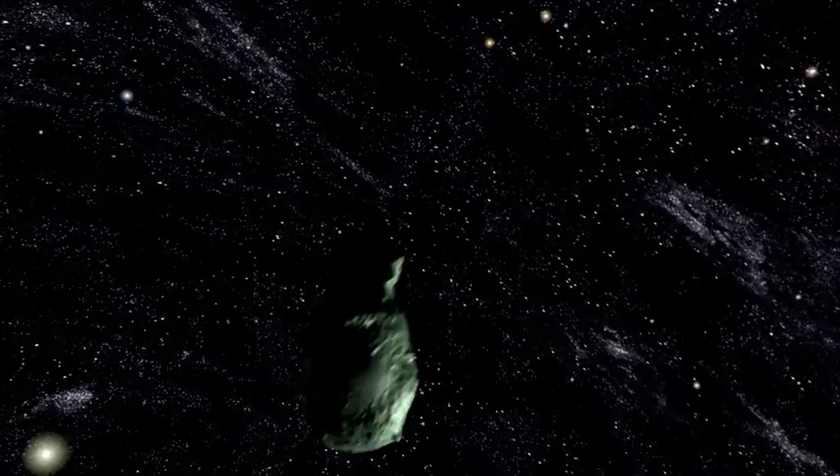In the name of God, the Beneficent, the Merciful. He it is who appointed the sun a splendor, and the moon a light, and measured for her stages, that ye might know the number of the years, and the reckoning.

The Holy Kaaba in Mecca, the direction of prayer for Muslims throughout the world. Here, in the near proximity to Islam's holiest site, the biggest clock in the world is being constructed to offer Muslims a new time source.

The custodian of the two holy mosques, King Abdullah, commissioned SBG, a leading Saudi construction company, to build the Mecca clock. With the project at heart, the king has been personally involved in each step of the development.

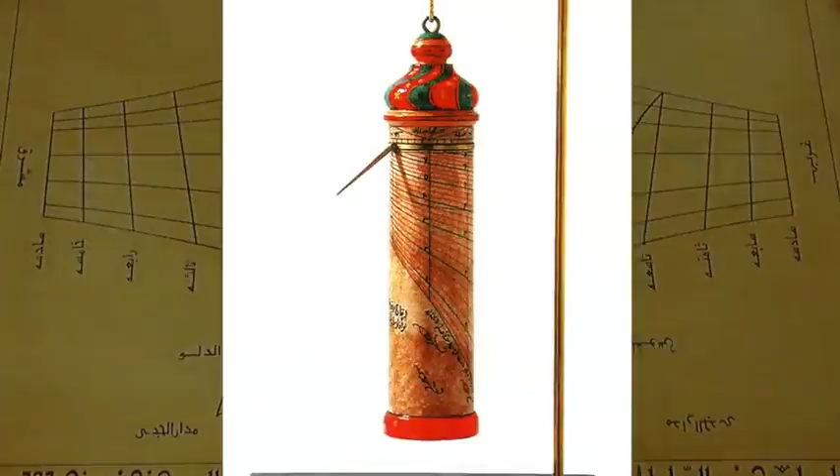Since time immemorial, man has developed instruments to measure time with ever greater precision and accuracy. In past centuries, Muslim scientists have developed instruments such as sundials, astrolabes, and mechanical clocks to improve the accuracy of time measurement and also help establish a more precise Islamic calendar.

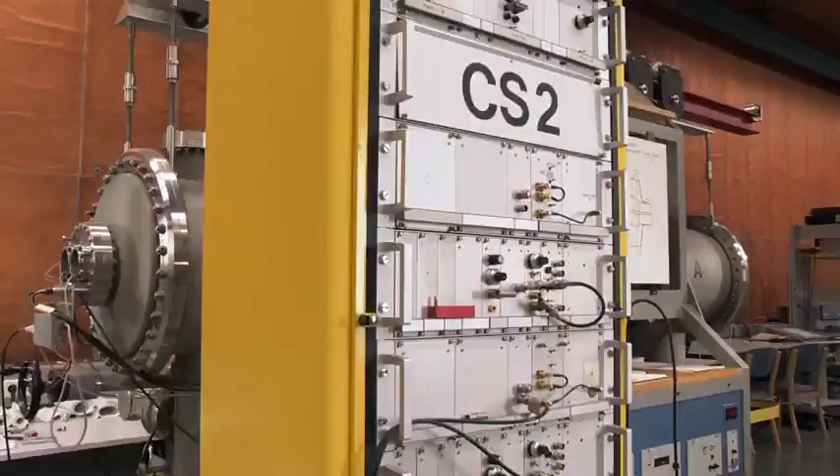Modern science and technology requires time measurement to be extremely precise. The Mecca clock features an atomic clock and will be coordinated with other time signals throughout the world, providing Muslims with a precise time signal, the Mecca time.

It was S.L. Rasch, a German design firm with great experience in the holy cities, that was commissioned to lead the development team of specialist engineers and scientific experts. Over the course of nearly 4 years, the team produced hundreds of design studies, revising and refining every aspect of the clock tower.

The design of a tower clock in Mecca is not something that you can pick up from a book. So we had to develop it in an iterative process, step by step. You do a thing, you do it again, you do it again, until it becomes good. And the eye knows more than the brain.

The lack of an historical model for an Islamic clock was the first challenge we encountered during the design of the Mecca clock. Our approach was to make an extensive study of all Islamic industries, such as metalwork, astrolabes, and Quran ornamentation. We made a thorough study of all this, and that enabled us to come up with a design approach for a clock that is modern on the one hand, and yet still designed in an Islamic style on the other.

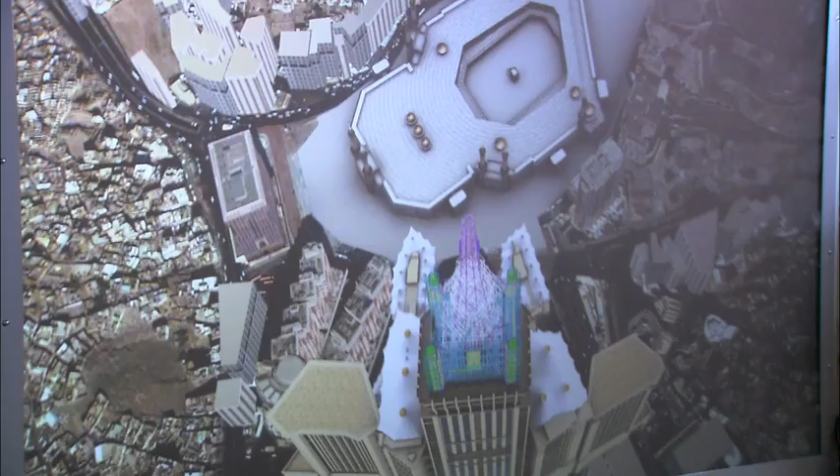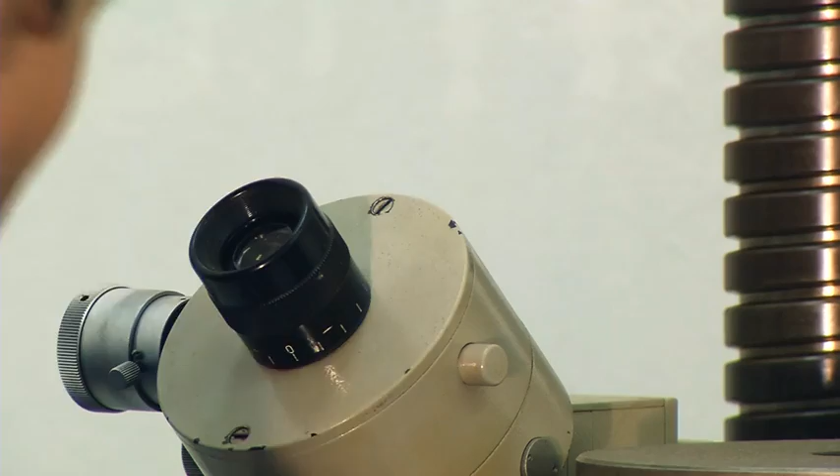A building of that prominence in this place starts to develop its own dynamism, and with the grace of God, it turned out to be a real thing. The large size and complexity of this project and the aim to reach the best possible quality required extensive scientific research. This included the development of new construction materials, techniques, and methods.

The clock tower combines innovative construction technology and authentic Islamic design. The higher management in Saudi Arabia issued new directives and initiatives in close collaboration with the team of architects and experts. The Mecca Clock Project truly sets a new milestone in history.

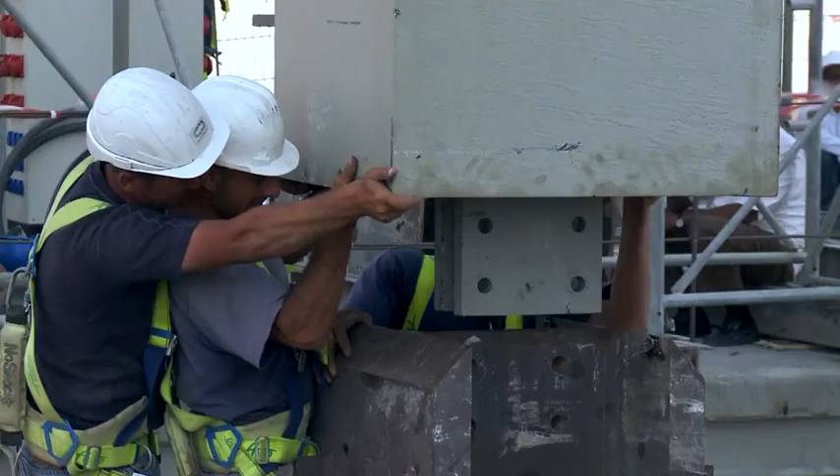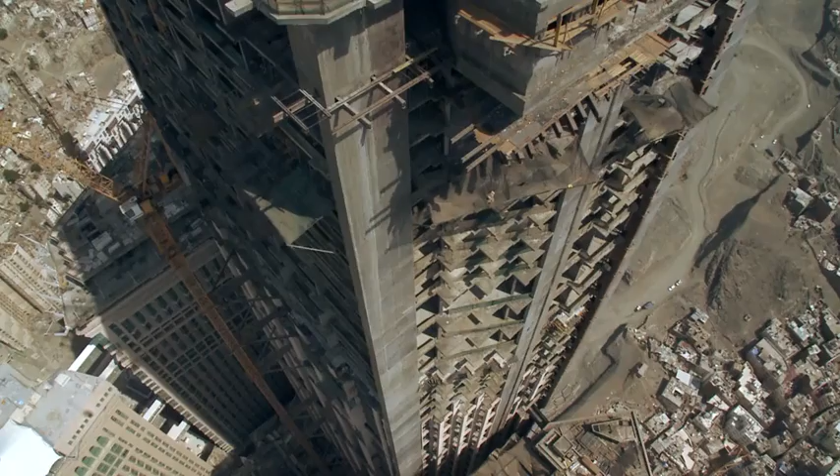The main difficulty of this project was to make a lightweight steel construction that would be able to carry this clock on top of a concrete tower. An experienced engineering firm from Stuttgart came forward with the best solution. Our task was more to extend an already existing building, which at the time hadn't quite been completed and had only partly been built.

The main challenge facing us was raising a 450-meter-tall high-rise building to over 600 meters. We only achieved this by using a lightweight construction. We took the Eiffel Tower as an example. The special feature of the Eiffel Tower is how it's designed according to the flow of forces. As forces increase, so does the size of the base. The idea was basically to develop a supporting structure in which forces flow directly from top to bottom.

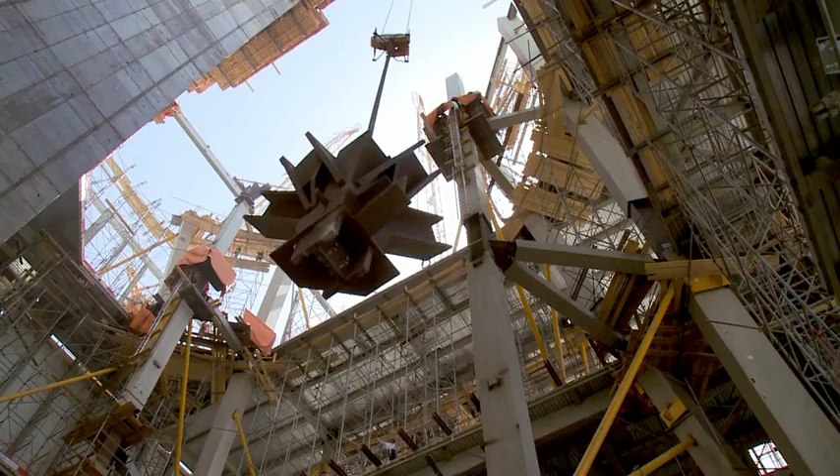The weight of the load-bearing steel structure is around 12,000 tons. That's around 2,000 tons more than the Eiffel Tower. The Eiffel Tower allows wind to pass through it, while the Mecca clock has a large surface area exposed to the wind, something the construction has to be able to cope with.

You could say that the face of the Mecca clock is about 35 times bigger than that of Big Ben. And on a clock face of this size, with a perpendicular wind force of 200 kilograms per square meter, there is a total of 300 tons force acting on the face. This is roughly equivalent to the weight of 10 medium-sized trucks. This is the kind of force the clock face must be able to withstand.

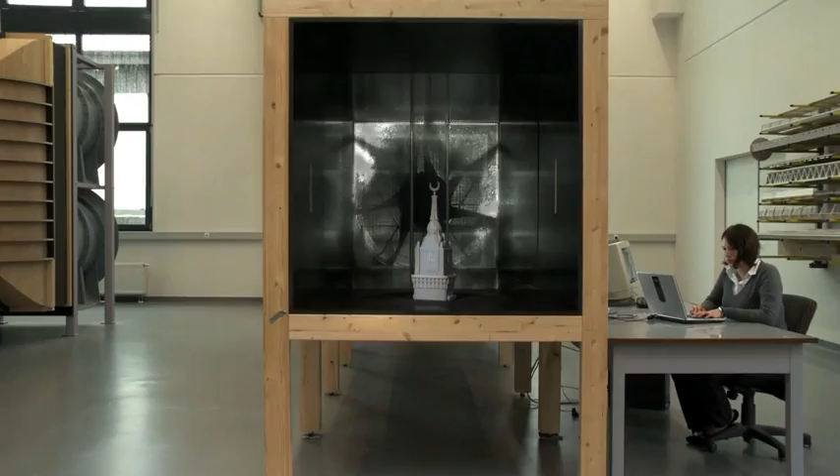For this reason, extensive wind testing was carried out. We want to make sure the entire tower doesn't just collapse. But this isn't all. Not only is there a clock face, but clock hands too. Each clock hand is roughly comparable to a wing of a medium-sized aeroplane. They mustn't hit the clock face. After testing, it was proven that there was no fluttering of the hands.

In both studies, those in the wind tunnel and in the numerical simulations, we had to make sure that we took standard wind speeds from the geographical location of the building. The building is designed for maximum gust velocities of 250 kilometers an hour around the spire. That is a wind that occurs once on site in Mecca every 500 years.

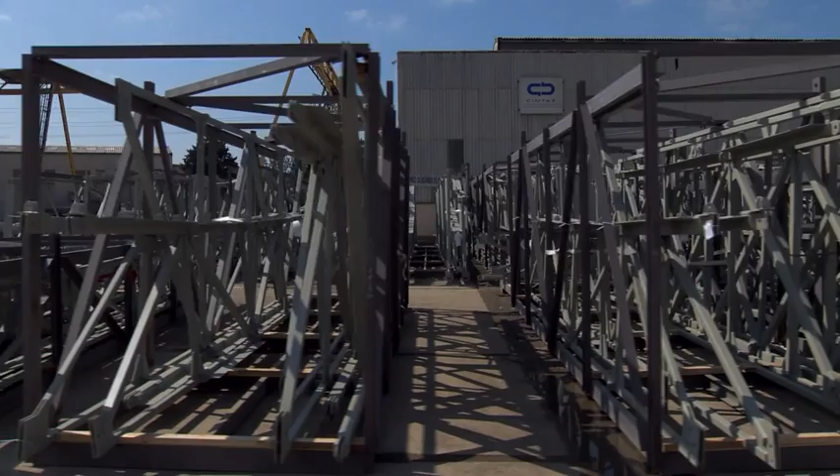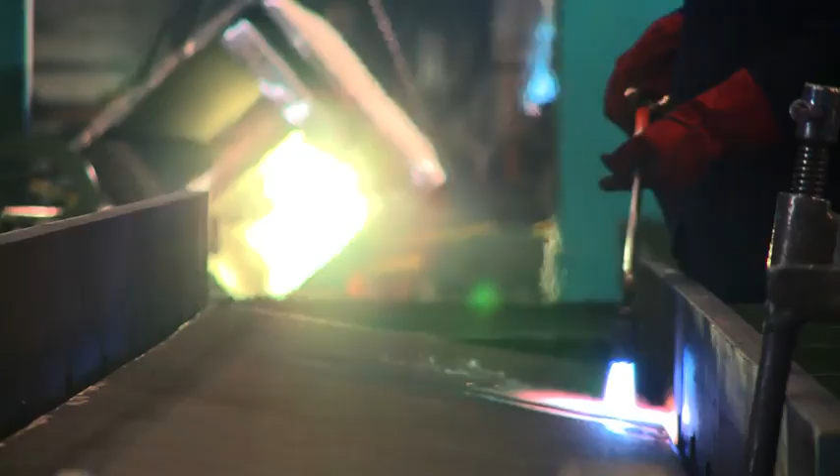An experienced manufacturer from Turkey was chosen to produce the steel components for the clock tower. Some 140,000 unique steel components have been prefabricated and welded together to make up the 14,000 distinct elements that we are going to install on site. The fabrication output at the fabrication shop has been up to 1,000 tons per month, with about 200 people directly involved in the execution.

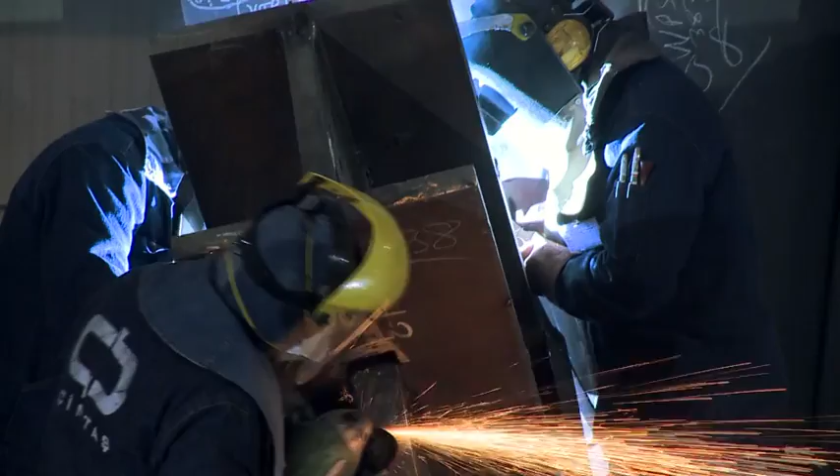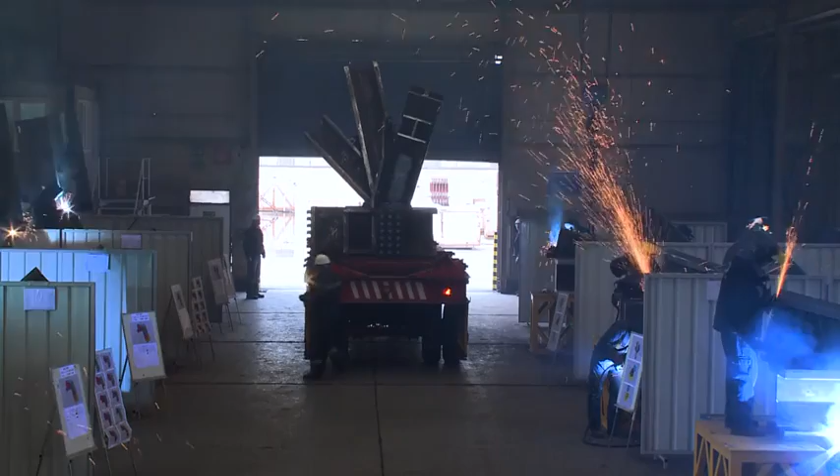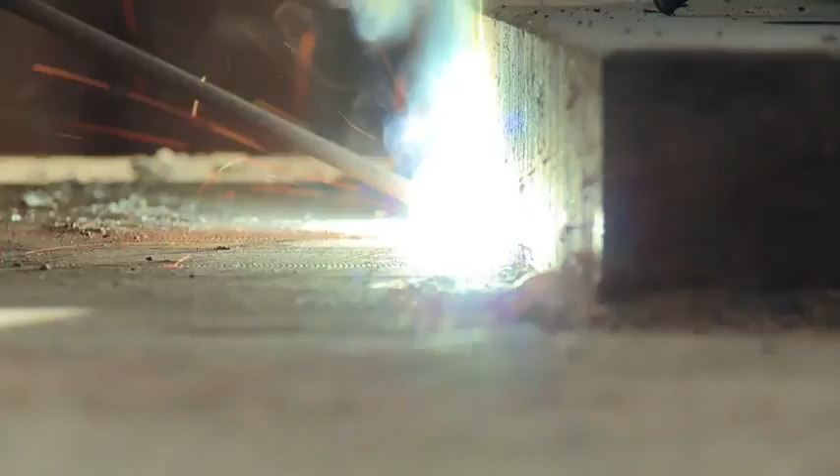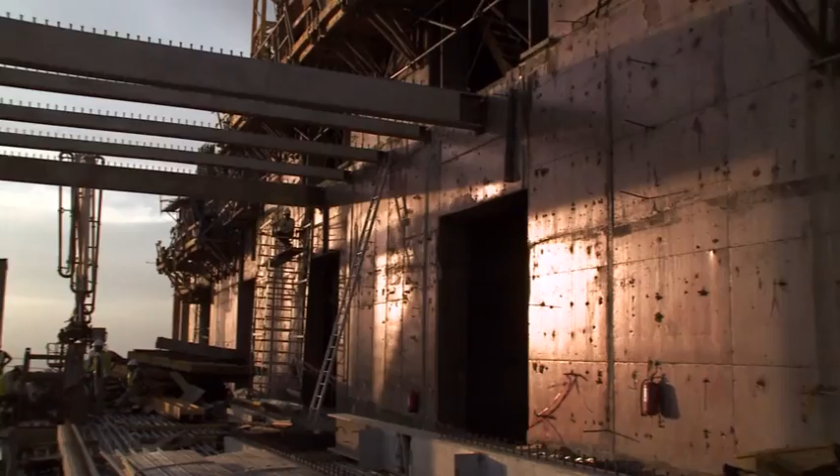These elements, and in particular their weight and size, have to be optimized in such a way that you are able to transport them and install them at elevation with millimeters of tolerance. At heights of up to 600 meters above ground, the steel was rigged and welded. Apart from its location and height, I believe the welding intensity is unique about the Makkah Tower project. Altogether, along with 45,000 bolts for connecting these elements together, more than 100 tons of welding material and 80 certified welders have been used on site.

Seven tower cranes were needed for lifting the parts. The Mecca Clock Tower has a total weight of approximately 83,000 tons. This makes it the heaviest clock tower ever built.

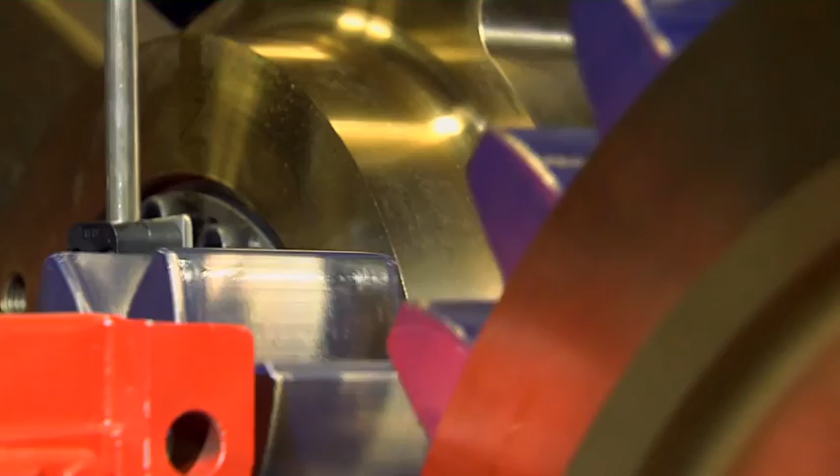For the development of the clock system, a specialist manufacturer was found in southern Germany. Making the world's biggest tower clock is a unique challenge for us, and one that no manufacturer of tower clocks has ever been faced with before. This project marks a milestone for us. Never in our company's near 150-year history have we ever had to deliver something of this size and scale.

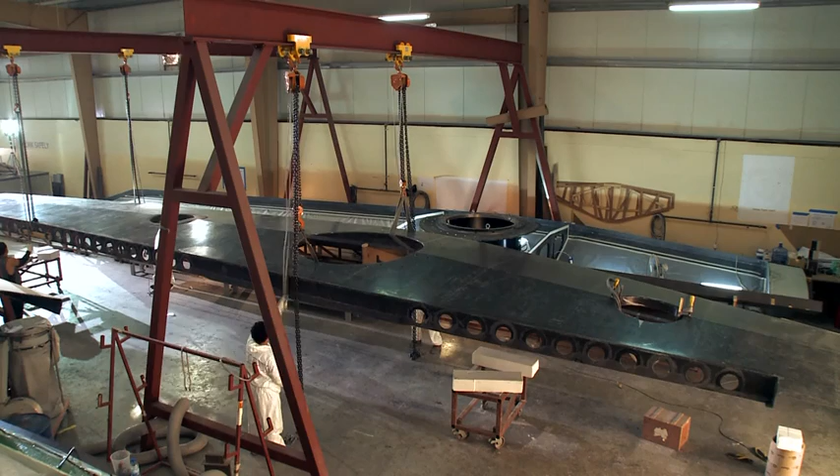The design and engineering of the world's biggest tower clock posed a unique challenge. In the early stages of planning, a traditional design was preferred, with long pronounced hands extending from the center of the clock face. The hands' huge dimensions and weight, however, raised immediate concerns. The major concern was that in stormy conditions, the hands would flutter and knock against the face of the clock.

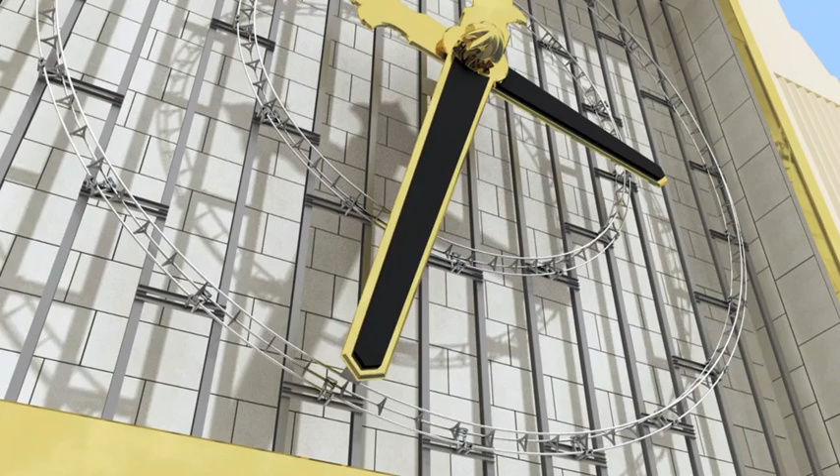The very first suggestion was to drive the large hand over a roller coaster. A circular track behind the clock dial then carries a vehicle that drives the hand through a slit in the clock face. We noticed that this solution had some disadvantages, most notably with dirt, abrasion and wear and tear. This was because the peripheral device was going round the track day and night.

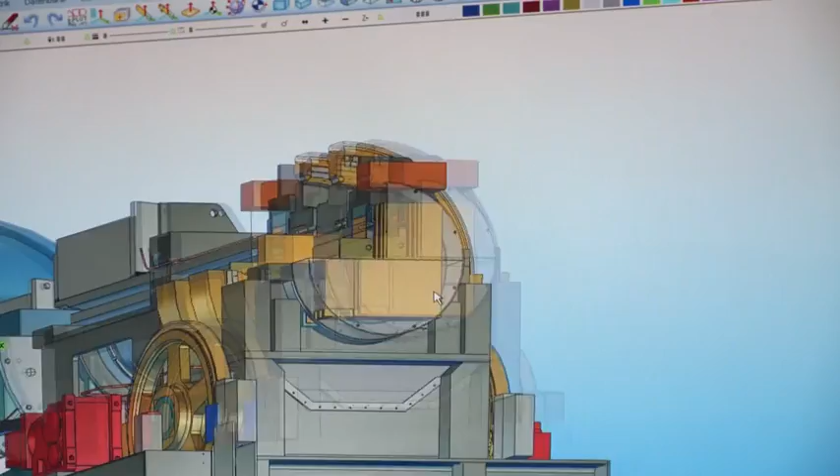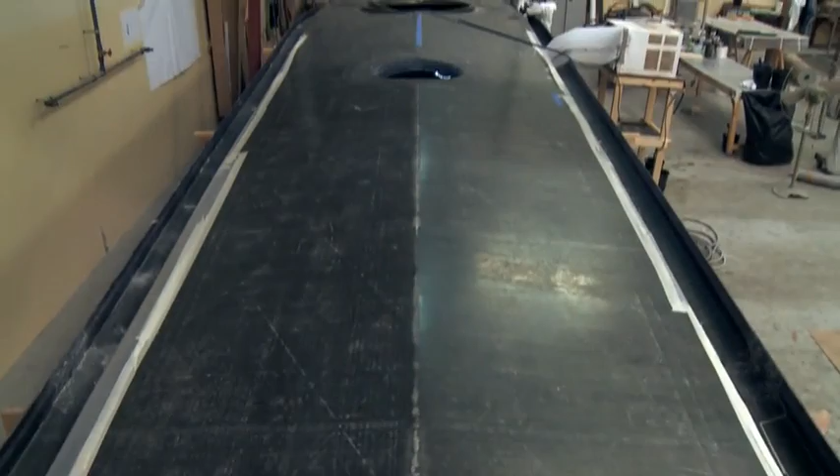Finally, we decided to change the whole clock face. We make it recessed in order to reduce the wind load. Secondly, we make the clock hands very, very stiff. They are stiff like a racing boat with pure carbon fiber. And on top of it, we go to a central drive system with a much more solid mechanism. So I think it will survive any storm in Mecca.

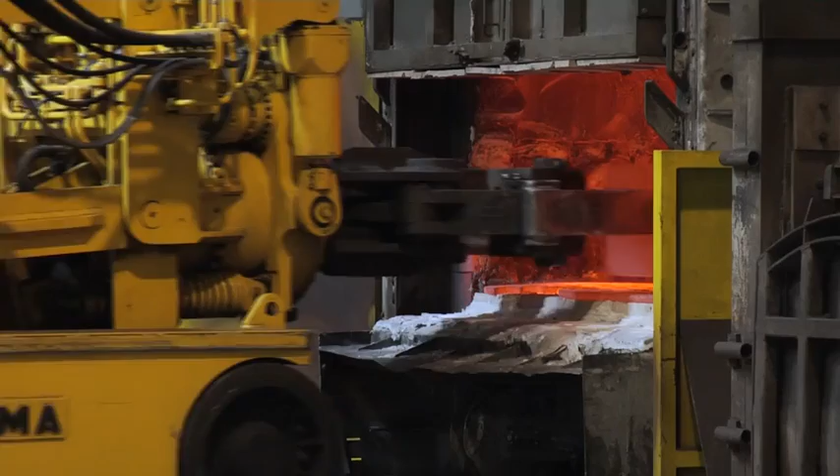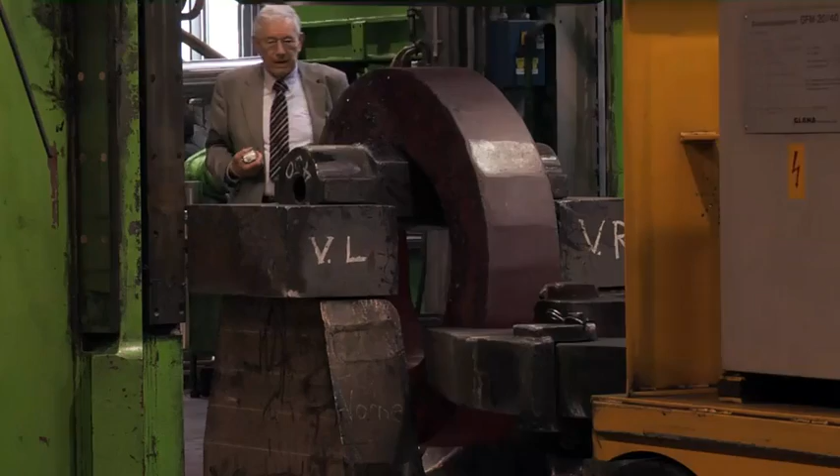The diameter of the clock face is 43 meters, and since this totally exceeds what's normal, new cogwheels had to be produced. The material is a special bronze that has very high strength, excellent gliding properties, and very little wear and tear. This is important when it comes to the operational lifespan of each part.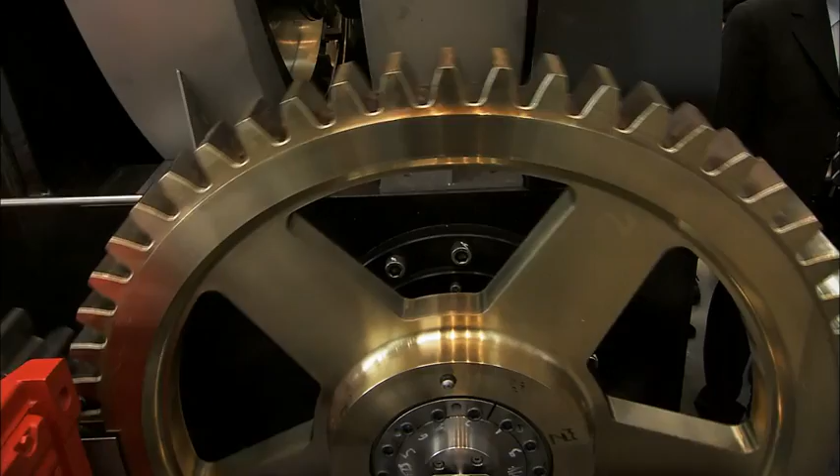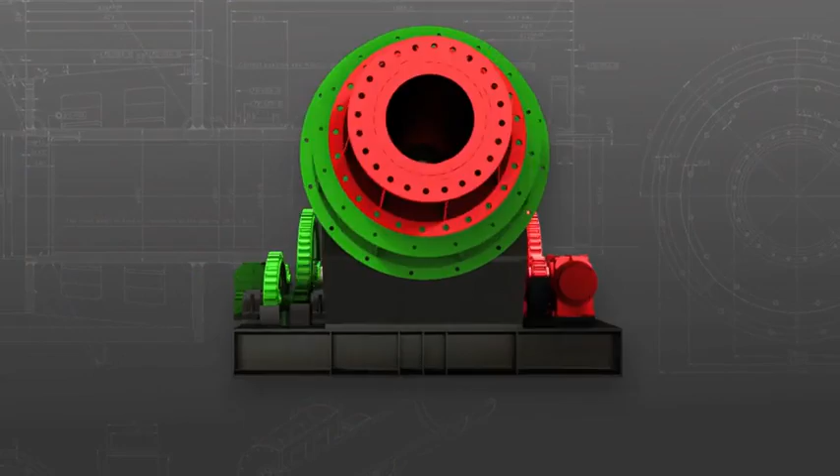The clock drive is the biggest and heaviest in the world. This unique mechanism weighs over 21 tons. The minute and hour hand are driven by separate drive units. The next stage of development was to produce a pair of rigid clock hands.

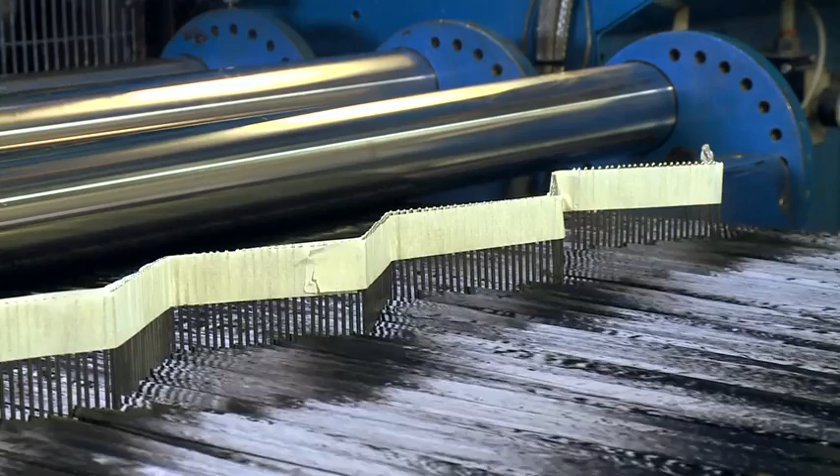The clock hands presented us with a particular challenge because they're very long, slender structures which are relatively highly loaded by the wind loading. In this case, we chose to use carbon prepreg. Prepreg is a material where the resin and the reinforcements are pre-combined in the factory.

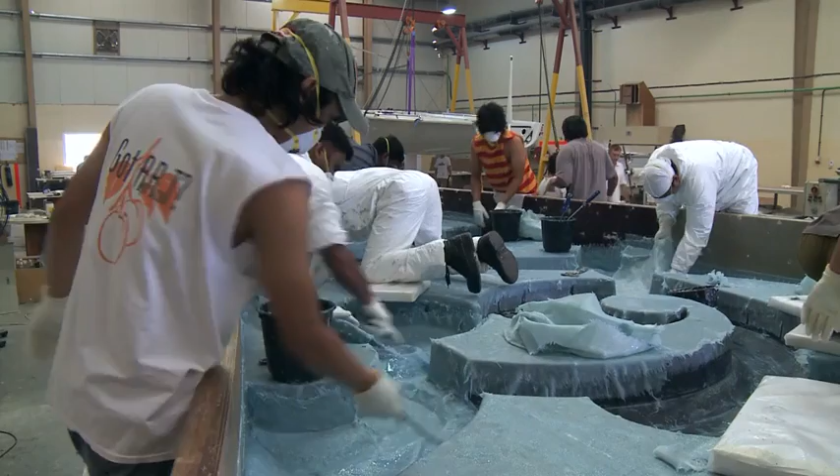The benefits of using these materials in the Mecca Clock Tower are that we can get a very accurate reproduction of complex shapes by moulding the facade panels. We also have a very good strength and stiffness to weight compared to traditional materials, so this reduces the weight of the facade itself. The clock hands, which are the highest loaded parts on the whole building, are built in carbon fiber prepreg. Same material is used in Formula One and the aeronautical industry. For me, it's the ultimate high-tech material.

The minute hand is 23 meters long and 3 meters wide, and it's built like an 80-foot racing yacht. We use 2,000 kilograms of carbon fiber on each of the clock hands.

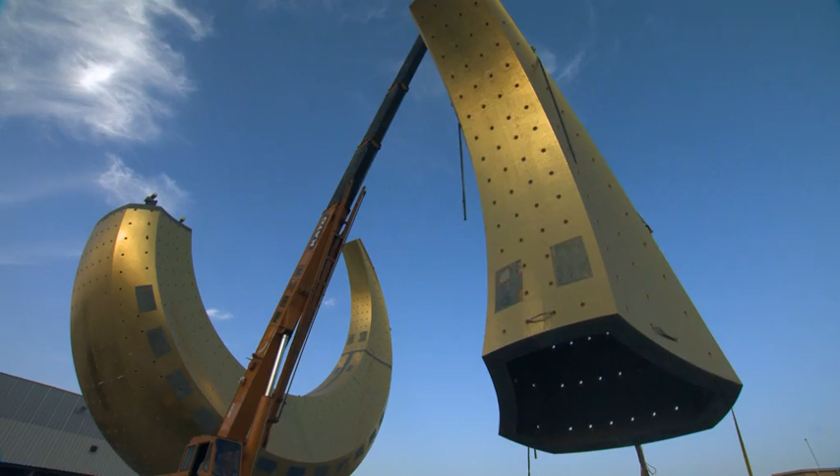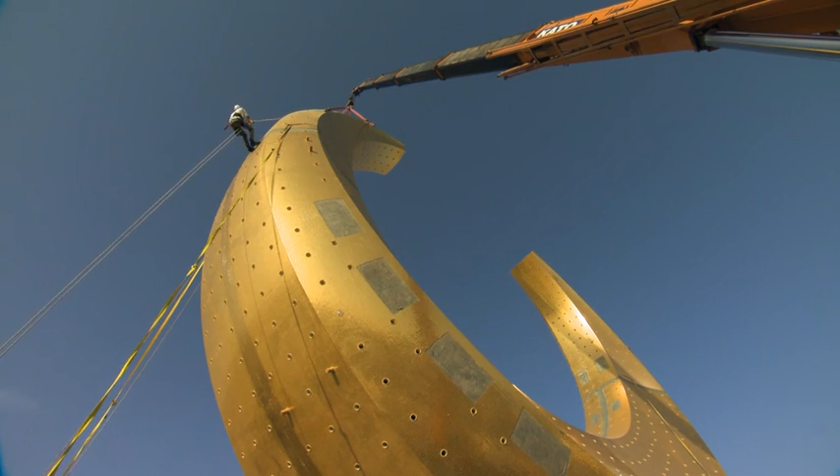The biggest challenge for us was the hilal. It's a monocoque structure, self-supportive structure, 25 meters wide. It is built completely without any steelwork. It has a composite shell cladded with gold mosaic and bulkheads and frames inside which carry the load. Upon completion, the crescent will house an office space and a prayer room, the highest usable space inside a building.

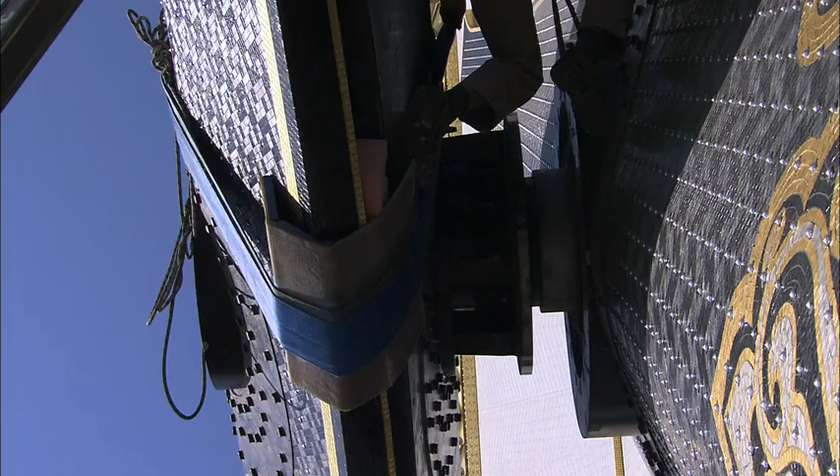The complexity of the whole design, with the combination of the composite panels, the mosaic tiles and the LED tubes, all came together to give us quite a challenge to be able to produce a structure that would meet the requirements of the design and also live up to the aesthetic vision of the architects. A quarter of one clock face was set up and successfully tested over the course of several months.

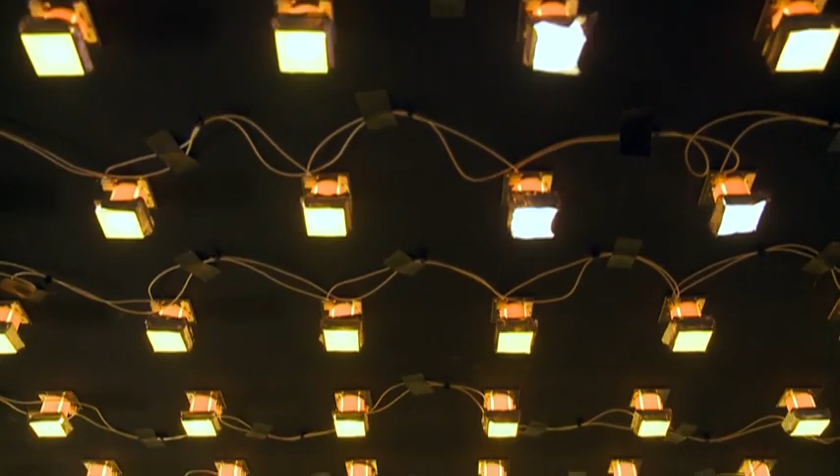The question arose immediately. Should the background be dark? Should the clock hands be bright? It's also a question of aesthetics. Theoretical studies of Christian Bartenbach showed that the best readability in the day is black and white, and the best readability in the night is green and white, which was different than what we had expected. The only idea coming was to equip the whole clock with LEDs.

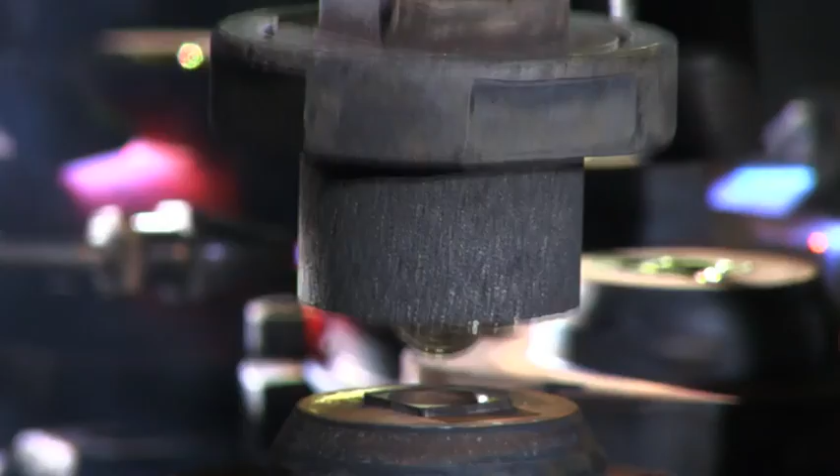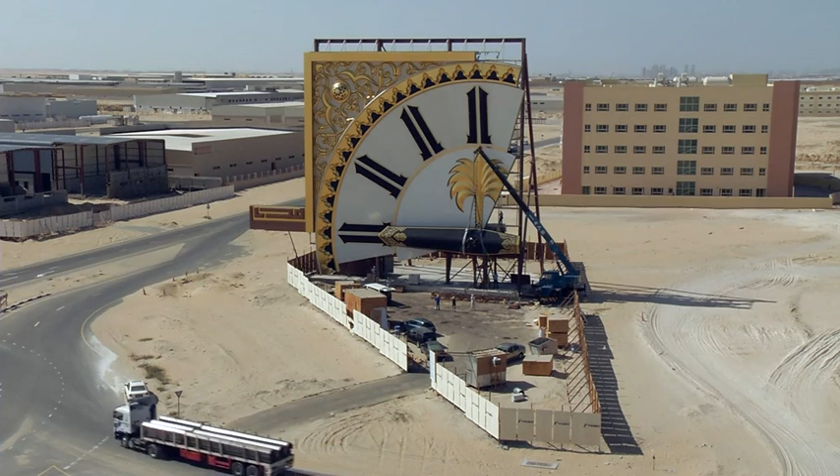New light sources like LEDs have very high luminance, 60 million candelas per square meter. In total, approximately 2 million specially developed LED light fixtures were produced. So we expect a readability of that clock in the day and in the night from 7 to 10 kilometers. Visually speaking, the realization of the clock in Mecca was a special task, and one that cannot be compared to any of my other projects. It's quite simply special.

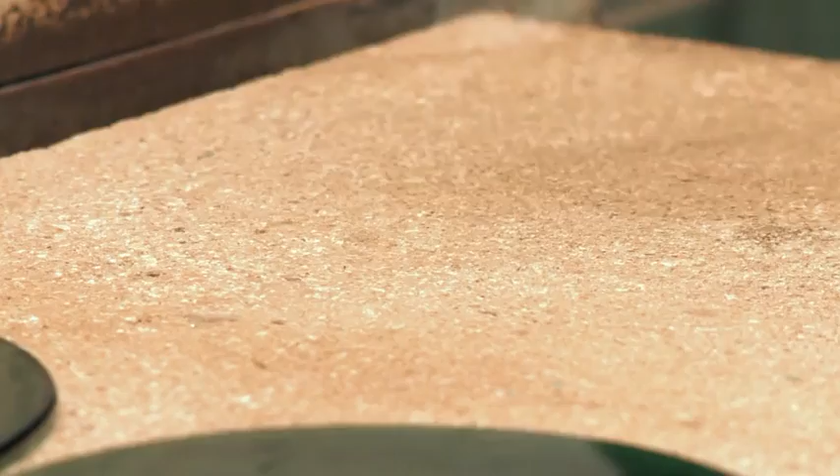You could say the tradition of Venetian glass mosaic is over 1,000 years old. The technique we use today is the same technique my great-grandfather, Angelo Orsoni, developed all those years ago. It's safe to say that the Orsoni brand is an exclusive and completely unique product. For centuries, this gold mosaic has been manually produced in small quantities by master craftsmen. In order to fabricate the required 13,000 square meters of gold tiles in 1 year, roughly the area of 2 soccer fields, this manual process had to be mechanized.

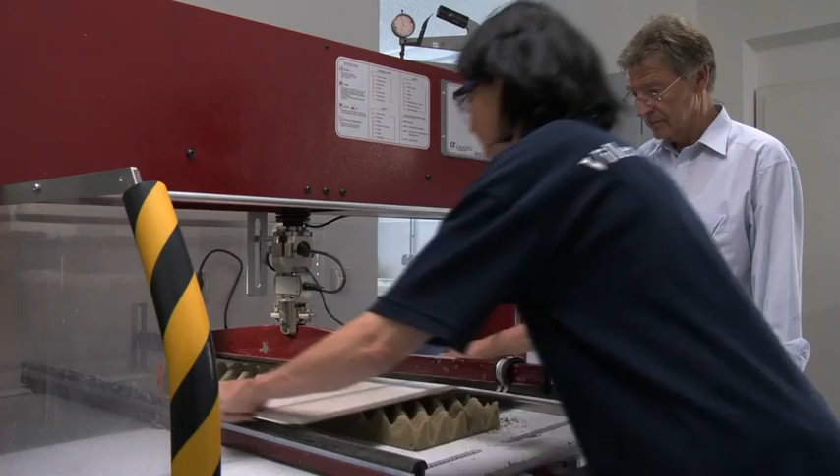Resistance to UV radiation, and particularly to shorter ultraviolet wavelengths, is important for the lifespan of the exterior paneling. Materials like ceramic are exceptionally resistant because they're composed like the Earth's crust and have a resistance of millions of years.

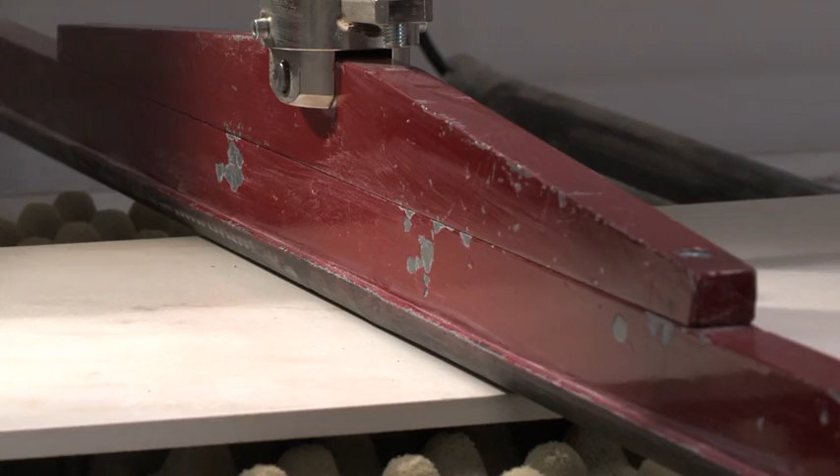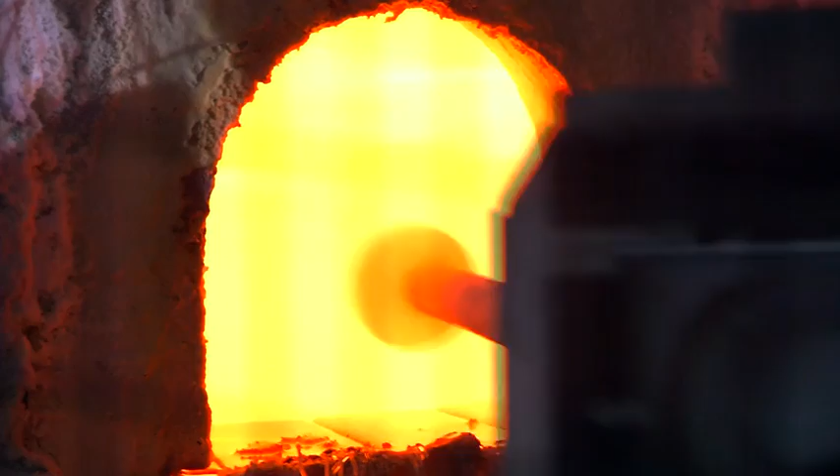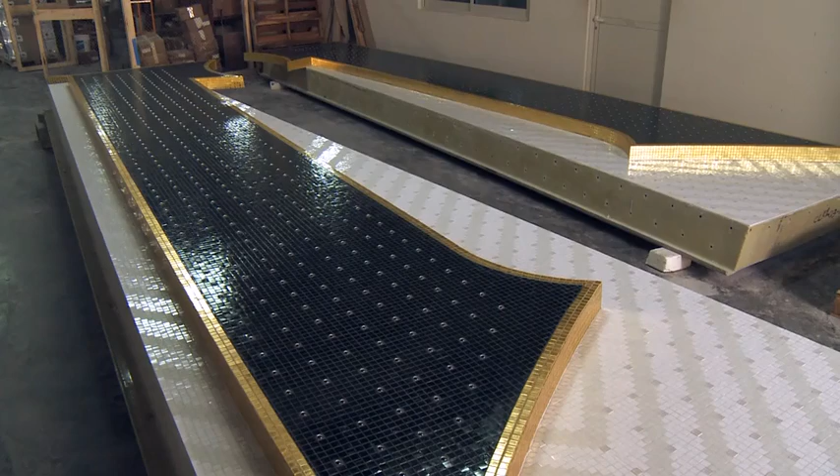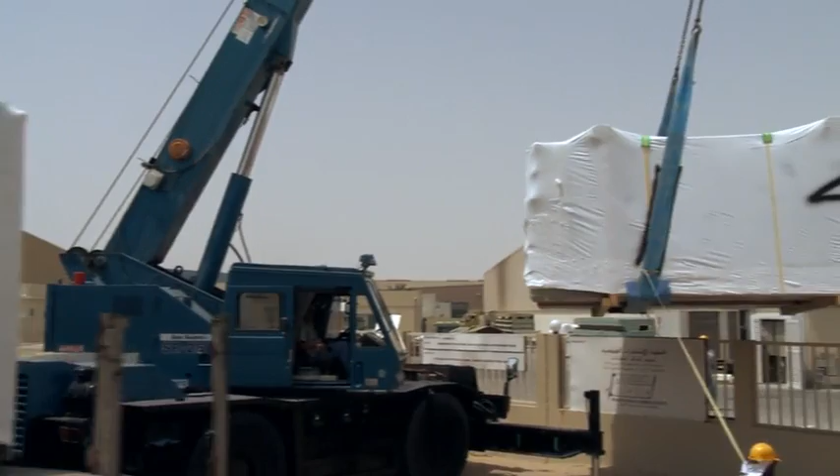In total, the ornate facade of the Mecca clock is covered with 93 million colored glass mosaic tiles. The fabrication of components in different parts of the world made transportation and installation a major design constraint.

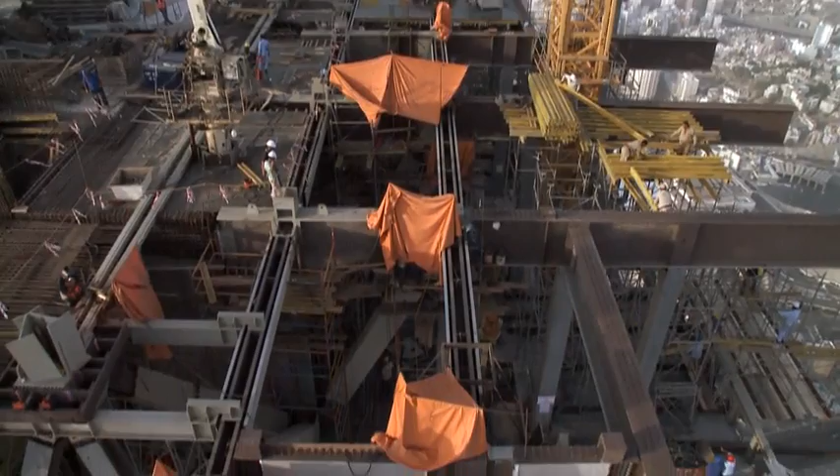Logistics was one of the major works and challenges of the King Abdulaziz Endowment Project. The clock tower was particularly challenging because of the scale of the project and its location next to the Haram. The project consists of two elements, the concrete works and the steel works. Together, they are approximately 600 meters high.

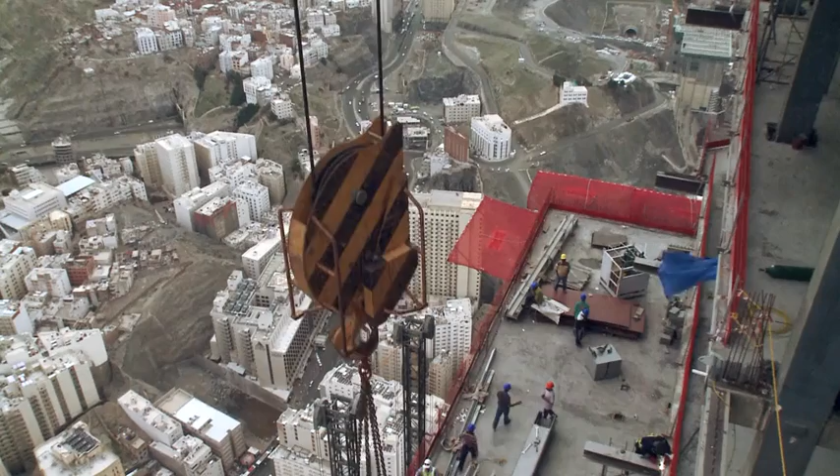Studies were made to find out how to undertake the installation works of the clock tower project. We installed a very large platform in the middle of the clock tower. The steel parts were placed on the platform and then lifted to the top of the tower by the upper crane. With the experience of SBG and the logistics team, this stage was successful.

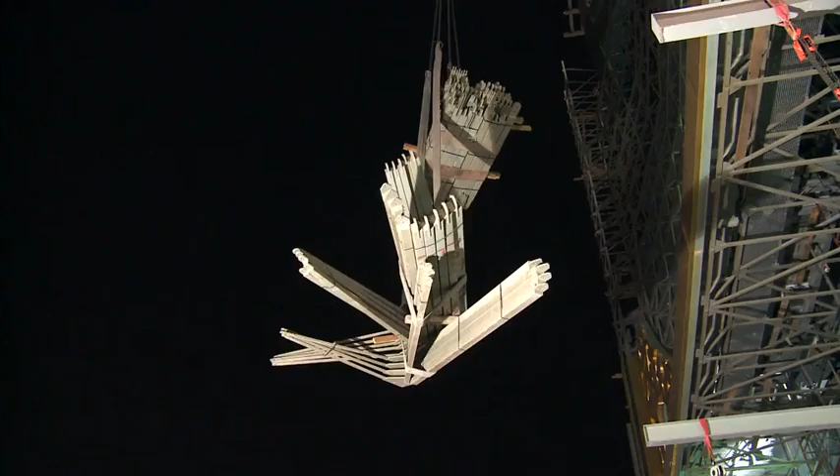The Saudi Bin Laden Group has a special high-rise building department, which specializes in both steel and concrete constructions. We've applied all this experience in the Makkah Clock project. There's no other project in the world that was carried out on a scale of this kind, to such a high standard and also within such a limited space of time.

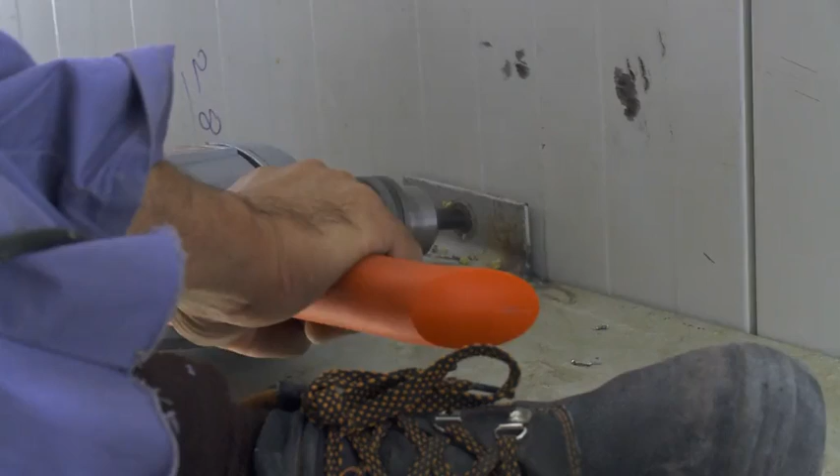The materials used in the project are, for the most part, non-flammable and non-toxic. This was also a unique aspect during the construction of the Makkah Clock project. One of the main issues the Saudi Bin Laden Group was much concerned with during construction was the issue of life safety. We assembled a special team of firefighters and equipment who are available 24 hours a day. We allocated this team a special lift to reach any area affected.

What's more, this project is located in Mecca and in the vicinity of the Holy Mosque. Peak occasions, such as prayer times, the Hajj and Umrah, the latter of which is all year round, make execution under such circumstances challenging. As the manager of the Makkah Clock project, my task was to coordinate with the designers and to follow the design plan and the construction phases in order to complete the work on time and to the required quality.

We, as Muslim engineers, were particularly proud to manage this unique project. Companies from Europe, Arab countries and Turkey were under our management. Coordination with the different authorities in Mecca, including the civil defense, the police, traffic departments and the Mecca municipality, all contributed to the success of the project.

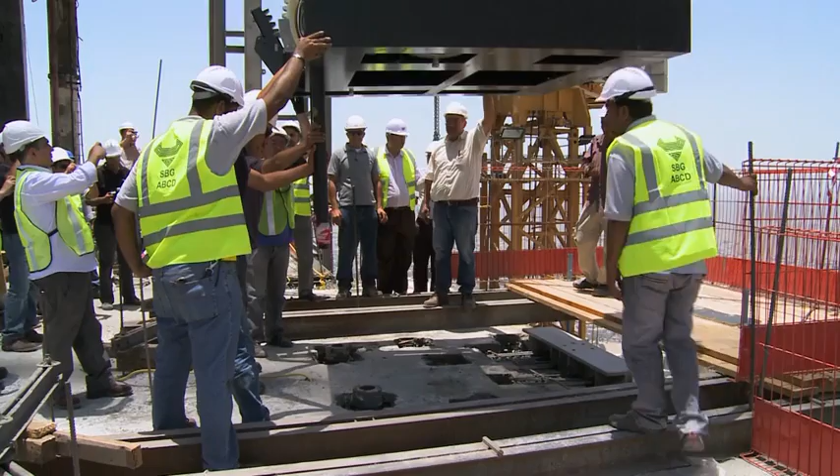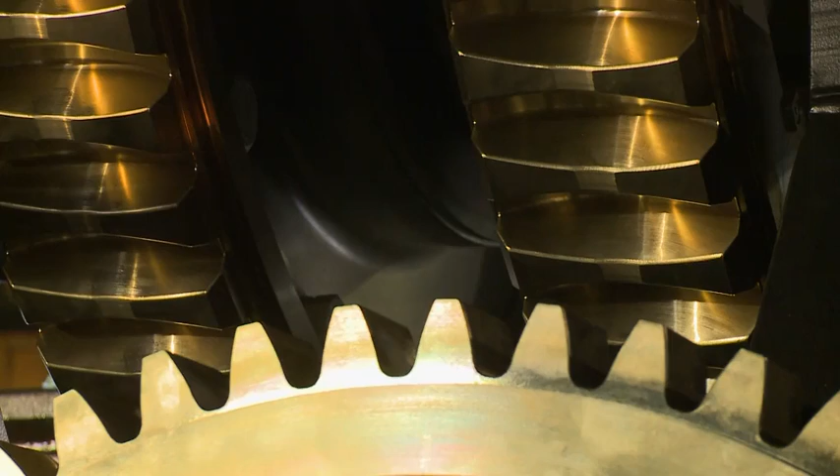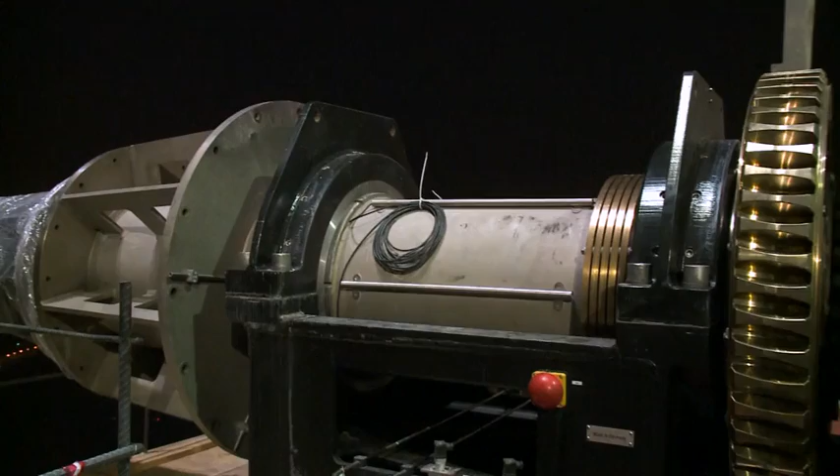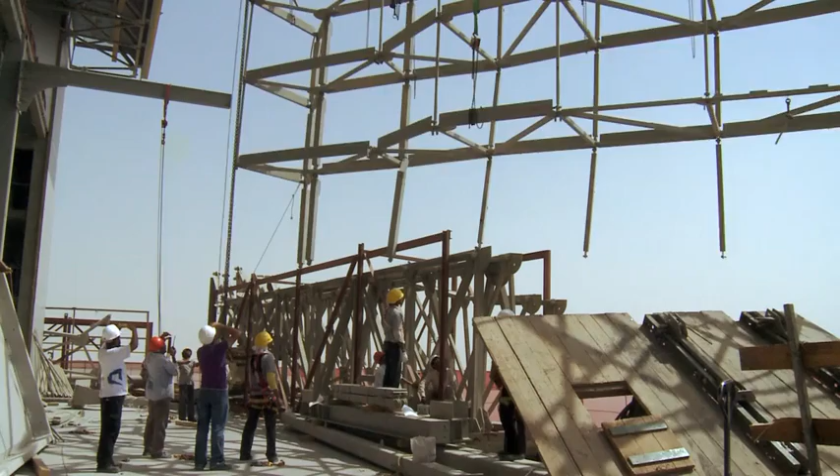All 4 drive units were successfully installed in their final location. Each section had to be installed with millimeter precision. The design of the clock face uses traditional Islamic features.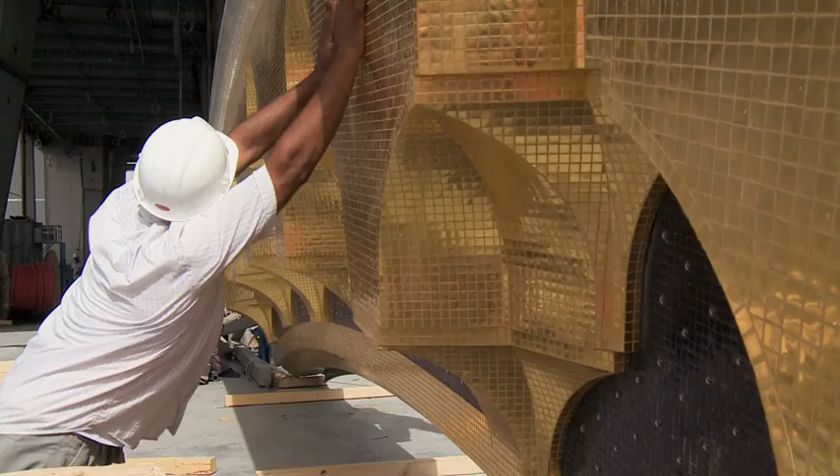The critical feature of really all the elements, and I'll speak directly to the floral elements, was that they should be clearly read from a very great distance, from the ground level. And this is such a very tall tower that the scale of the ornament had to be really quite massive.

The other critical feature of the design was the form of the relief, and this also took quite a lot of trial and error and testing to finally come up with a relief form that was legible from 15 meters or greater, as well as had visual interest up close, because in some locations in the domes you can also see them close up, so it had to work both close up and far away.

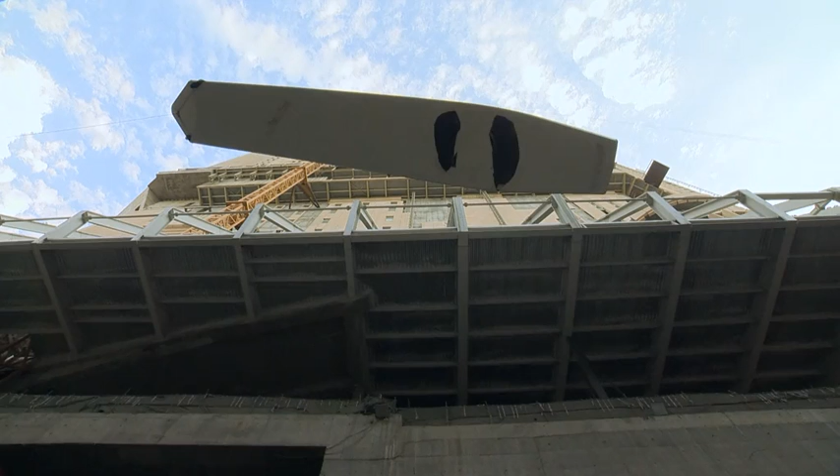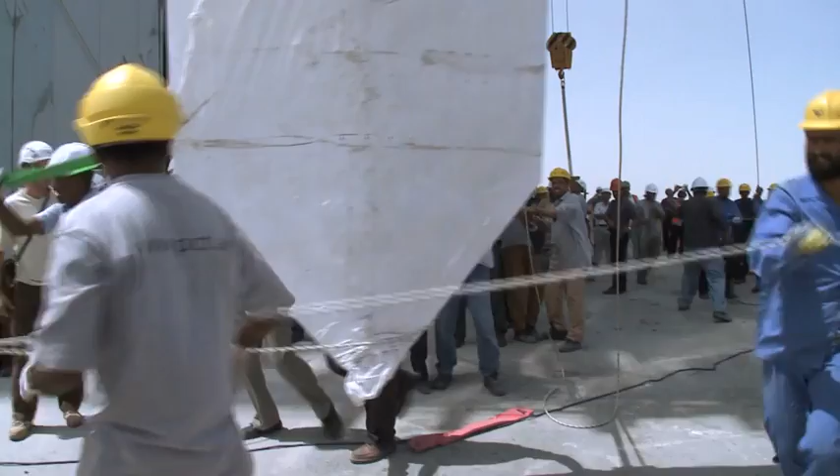The world's largest written takbir, the phrase Allah is great, is visible on the panels above the clock. The letter Alif is more than 23 meters long. 500 meters above the ground, specially trained workers combat strong winds to maneuver the clock hands into position.

In total, the front and back facades of the Mecca clock measure 83 meters in height and 67 meters in width.

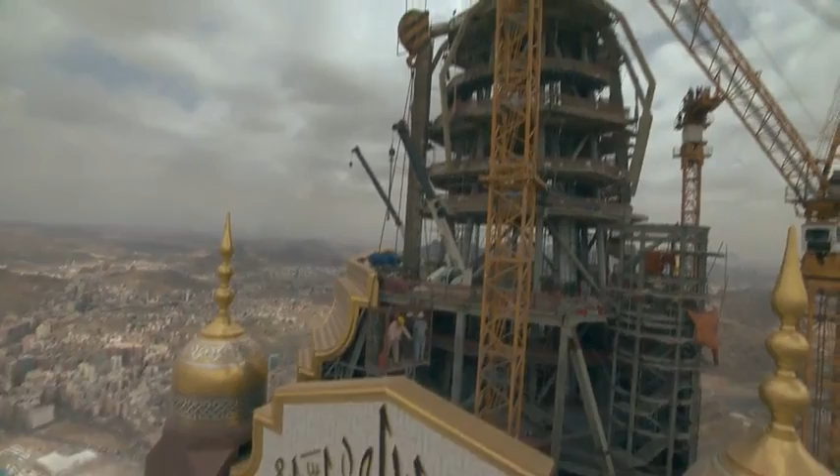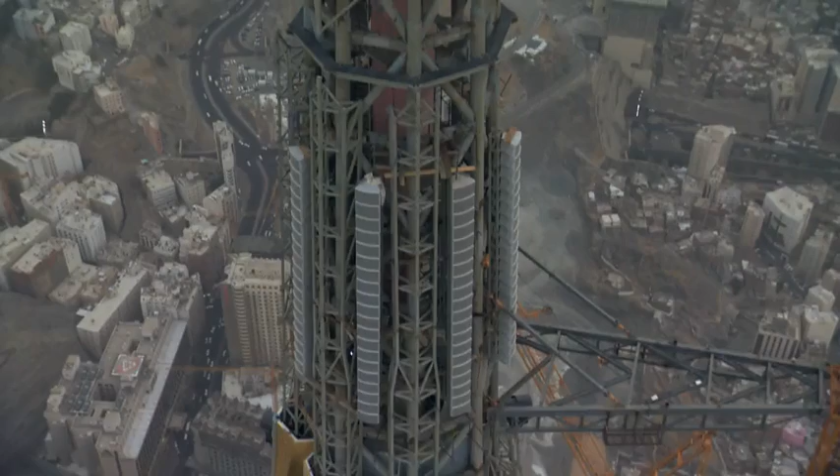At a total weight of 107 tons, some of the crescent's largest sections push the lifting capacity of the cranes to the limit. A specially developed loudspeaker system broadcasts the call to prayer 5 times a day over a distance of 7 kilometers.

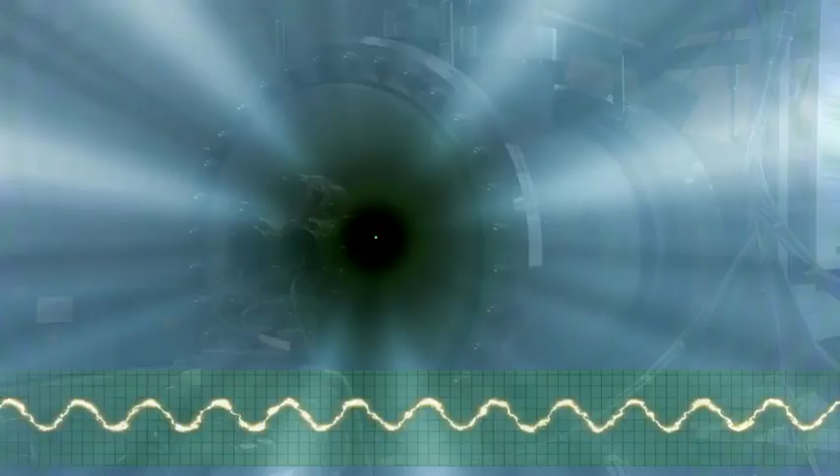The second in atomic time is defined as a certain number of multiples of period of radiation that is resonant with the cesium atom. And when the new atomic definition of time was introduced in 1967, of course one tried to make the new definition match the old one, and this is what gave rise to this number of cesium oscillations that defines the duration of 1 second.

Every cesium atom, however when and where in the universe it is observed, will oscillate at the same frequency, and this is the principle behind the atomic clocks. 50 time institutes worldwide use the latest cesium atomic clocks to generate a single time signal, the Universal Time Coordinated, or UTC. UTC is used as a universal time standard and is considered as today's world time.

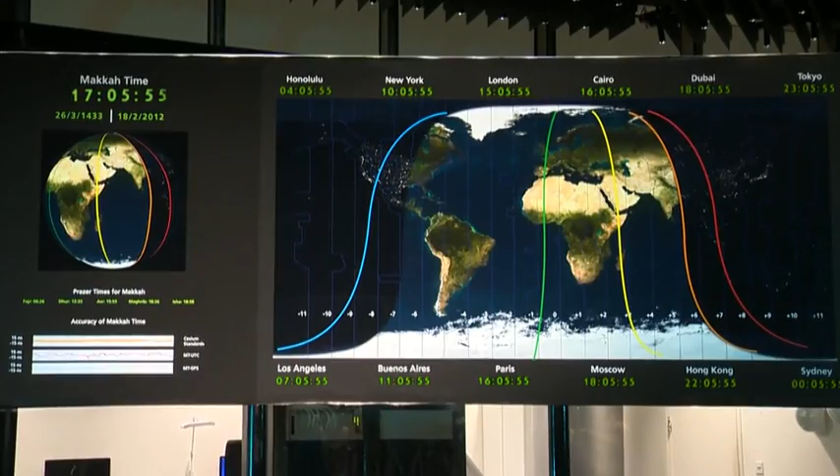The Mecca Time Institute intends to be part of the UTC network. It is the first and only time institute serving the scientific community, while also providing services to Muslims throughout the world. It will generate its own time signal, the Mecca time.

Throughout history, minarets, such as the one at the famous Umayyad Mosque in Damascus, have been equipped with beacon lights to signify the start of prayer. On the Mecca clock, 21,000 sparkling lights illuminate the top of the tower. They are visible both day and night, from distances of up to 30 kilometers. They help the hearing impaired and those at a great distance from the mosque.